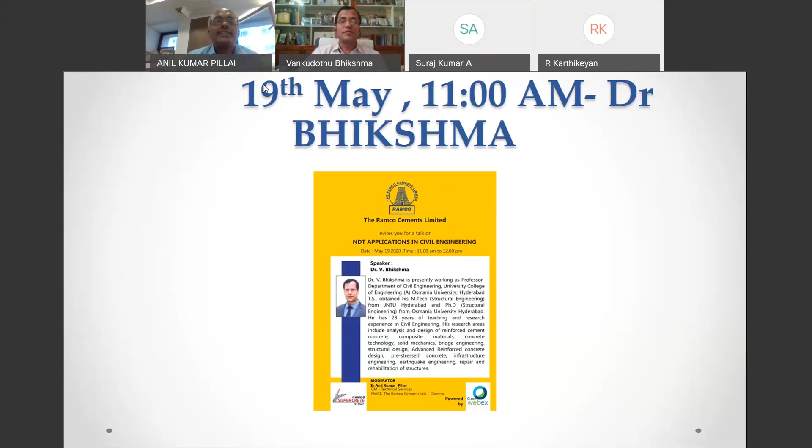I am sure that with the kind of diverse interest that Dr. Bhikshma has, he is the right person to share with us the various nuances of non-destructive testing in concrete structures, and how NDT can be applied in civil engineering.

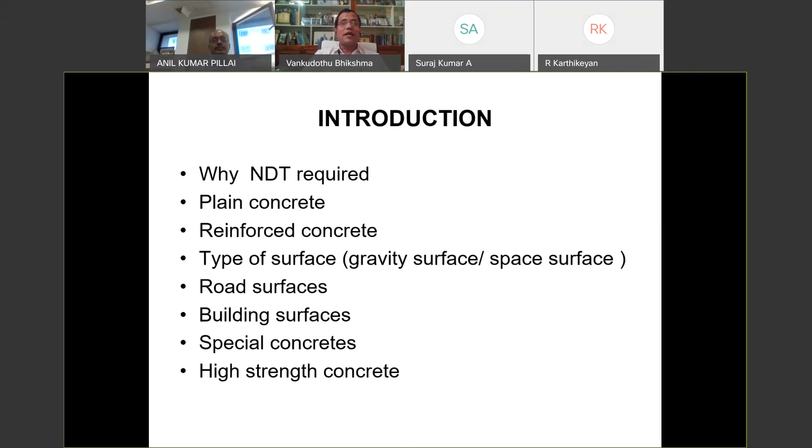To conduct this NDT, we can have plain concrete, or reinforced concrete, gravity surface concrete, road surface concrete, buildings, any special structures, even low grade or high grade concrete - any type of concrete for which we conduct NDT. But one condition is that we can conduct NDT only for cement concrete, not for lime mortar type of concrete or some other concrete. So NDT is applicable only for cement concrete.

To conduct the NDT, first of all, we should know the mix design. Actually, whether mix design is done properly for the concrete or not, we should ensure first. If mix design is not good, then we cannot blame the concrete. Your mix design itself is not good, therefore definitely concrete quality will be poor. So first of all, ensure ourselves that our mix design is good. So we have to first do mix design.

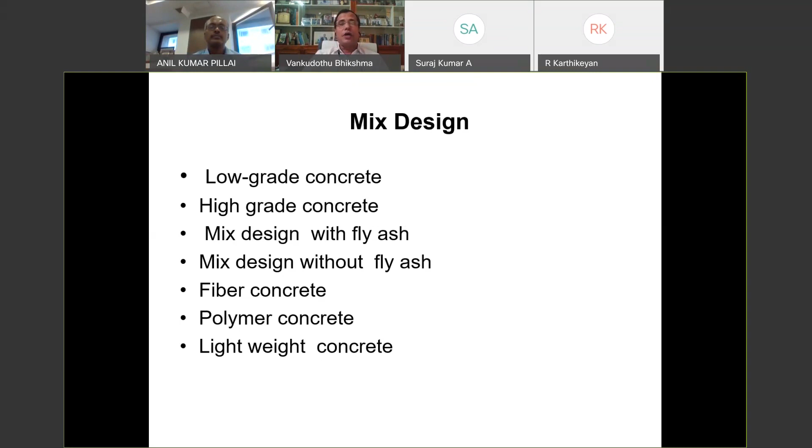To do mix design, we know all the cases for selecting the parameters in mix design. Mix design can be low grade concrete, it can be high grade concrete. The mix design can be with fly ash, mix design can be without fly ash, mix design can be with fiber concrete, polymer concrete, lightweight concrete. It can be with any concrete. So we have to ensure first that our mix design should be good.

Not only that, structural deficiencies in poor concrete also one should know. To conduct NDT, why are we conducting NDT? When some defect is there, we are going to conduct NDT. What is the defect? Suppose a crack is there on the structure. Then if a crack is there, we get a doubt whether the structure is going to survive in future properly or not. Then in that case, you can go for NDT.

Not only that, why are cracks coming on the structure? Cracks may be due to high heat of hydration. Cracks may be due to improper compaction. Cracks may be due to improper ingredients of the concrete. There are several reasons for that, but first of all we should see that we should not have a deficient concrete, we should have a perfect concrete. To have a perfect concrete, we too should have a perfect cement, good quality cement.

Why do cracks normally come? People will say it's with cement. It is not only with cement, it is with some other things also. What are the cracks with some other things? That is nothing but maybe low size of the fine aggregate with which shrinkage cracks will come. Maybe with design also cracks may become, your deflection is not properly designed for a particular beam. Therefore a crack may come. There are several reasons for that.

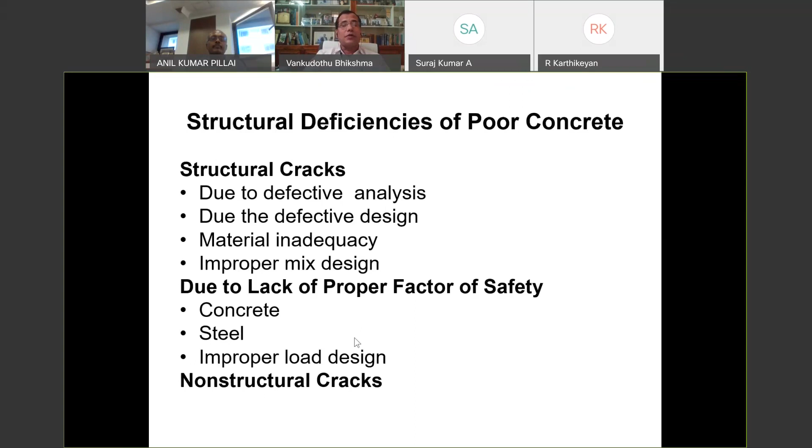Due to defective analysis, due to defective design, due to defective material, improper mix design, there are several reasons for cracks actually. Due to lack of proper factor of safety also sometimes not maintained properly, due to which also cracks may come. Other reasons for poor quality concrete may be OPC cement, maybe PPC cement. Why OPC cement with which crack will come? Because OPC cement will have high heat of hydration. High heat of hydration leads to cracks, and PPC also sometimes cracks will come because of the percentage.

The percentage of ordinary Portland cement and PPC, that is 75% and 25%, we say normally the optimum dosage. Suppose if your PPC percentage is too much, then there is a possibility of getting cracks again. So we should think about what is the optimum dosage for that, think about it, and then use it for our concrete after making several trials. High strength concrete also, due to high excess cement, cracks will come. Low grade concrete, due to low percentage of cement, again bulging takes place due to improper setting.

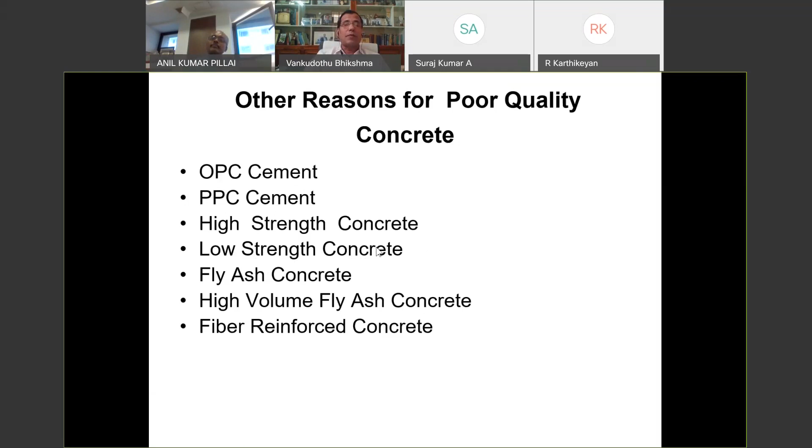So there are several reasons for the cracks again we can say, and poor quality of concrete. Defects in poor quality concrete may be due to raw material, mix design, preparation of concrete, transportation, formwork, placing, compaction, curing and finishing. There are several reasons for getting poor quality of concrete.

Then what should we do actually? How should we control this? Some of you can ask me a question that, sir, to control the quality, there are several measures now. We have ready mix concrete, we have good quality cement, all these things are there. Why again is poor quality coming? That is in our hands again.

Selection of the material is very, very important. Doing mix design is very, very important. Selection of cement is very, very important. Knowing the high excess cement in the concrete is very, very important. Because nowadays we are all moving towards PPC cement. Why? Because your heat of hydration can be controlled. To control heat of hydration, we are moving towards PPC cement. Really, OPC cement has a problem, the heat of hydration problem. So all these things one should understand.

Not only that, ingredients of the material and the reasons, all should be known. Then only we can control the cracks and all the problems in concrete. Sir, your presentation is on NDT.

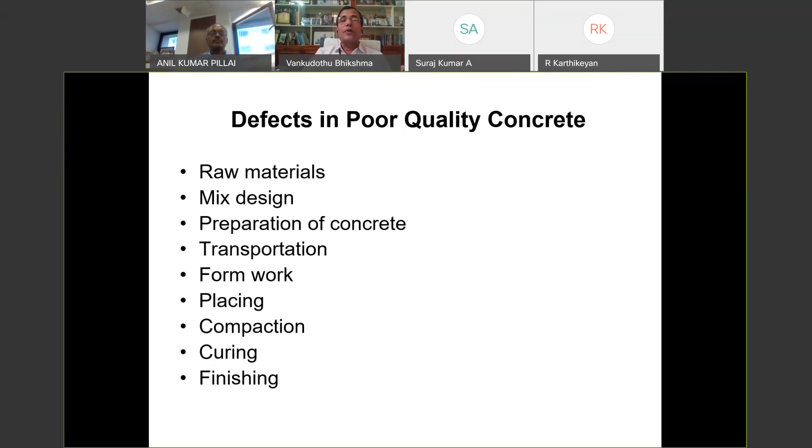Why are you explaining all this? You can think about it, but as an engineer, we should know all these. Then only we can think of NDT, because when we are going to conduct the NDT, you should know the reason why crack should have come. And if I conduct the NDT for a cracked surface, what sort of results am I going to get? This sort of understanding and knowledge is required for an engineer for proper interpretation of the NDT results.

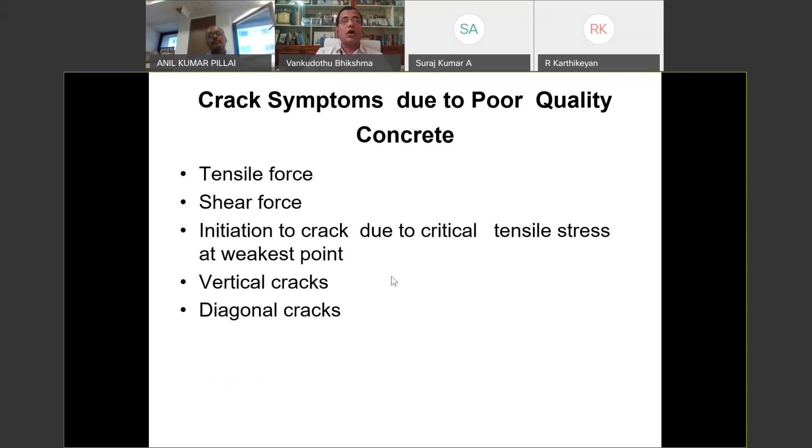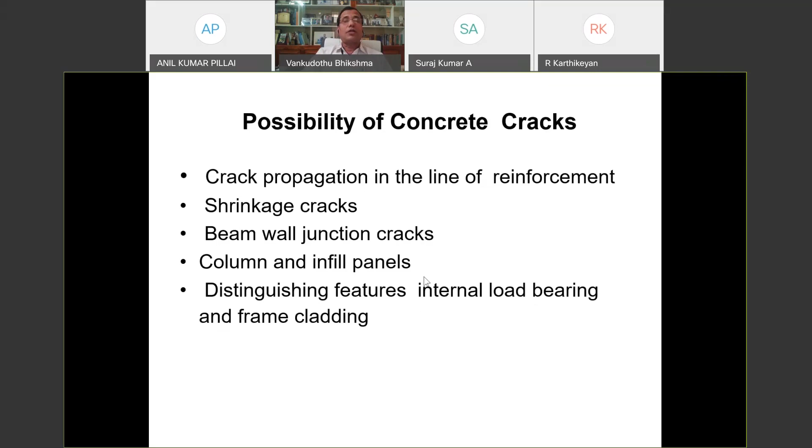That's the reason why we should know all this. Crack symptoms occur due to poor quality concrete, sometimes tensile force, shear force, initiation of cracks due to critical tensile stresses, then vertical cracks, diagonal cracks, all these may be. There is also the possibility of concrete cracks due to shrinkage, due to wall junctions, beam-column junctions, where proper condition is not being maintained. Similarly, in column infill panels, distinguishing features, internal loading etc. will be there, and because of that, cracks will come.

Distortion of cracks due to force, combination of forces, shear cracks, tensile cracks, variability of materials, non-uniformity of the mix design, quality control, maintenance — all these are reasons.

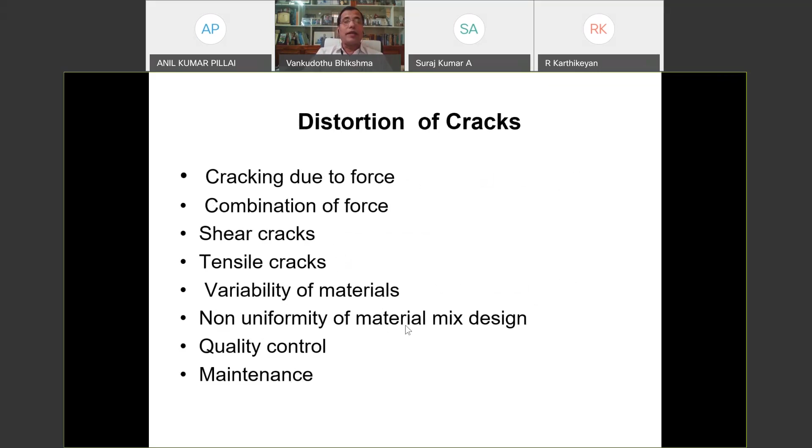Dampness is because of permeability, dampness is because of fine and coarse aggregate. Sometimes we think that good cement and good concrete are used, but still dampness will be coming from some place even for a newly constructed building. We think everything is done correctly — engineer executed well, curing done perfectly, materials used perfectly, mix design done perfectly — why again is leakage coming? These sort of doubts we get, but something has gone wrong there.

What is that something? Not cement. Cement is good, but fine aggregate grading has not been done correctly, because of which micro cracks will form, and through these micro cracks water goes, and if water goes there, dampness prevails. If dampness prevails, definitely there will be permeability. With that permeability, your concrete media becomes very weak, and then it becomes a catastrophic failure at some point of time. That is the reason why we should care about all these, then only we can understand perfectly.

Nowadays, the cement and other materials coming in the market are good, but the other ingredients are causing problems. We are not able to maintain sand grading properly. What should be the sand grading actually? Sand should have a fineness modulus of approximately 2.8 to 3.2, but that fineness modulus is not being maintained.

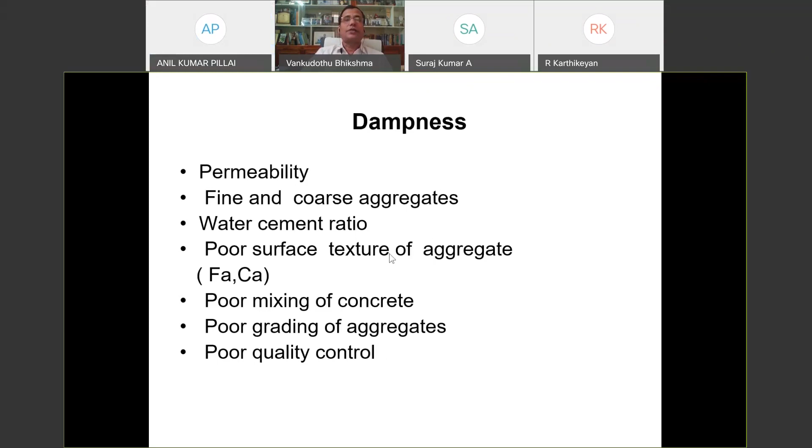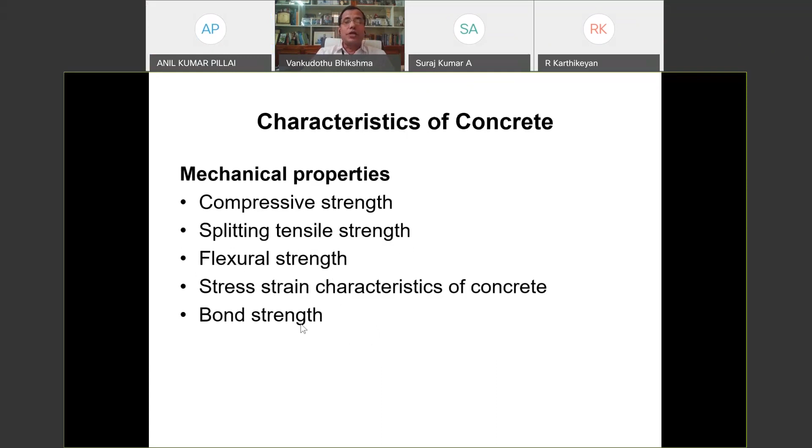Characterization of concrete is also very important. Mechanical properties one should know — compressive strength, splitting tensile strength, flexural strength, stress strain characteristics — we should know all these, then only we can understand. So why am I explaining all this? These are basic fundamentals that we need to know — why cracks are coming, why problems are coming for structures — those are some of the reasons actually.

And we want to know NDT techniques for concrete structures — what are the NDT techniques that help us control all these cracks, control all this permeability. If quality is not there, it means something is happening to the structure. How can we know that? We should not destroy the structure, we should not disturb the structure. Without disturbing, without demolishing, without doing harm to the existing structure, we need to assess it. We need to know the reasons for it, and after knowing the reason, we have to do something about it.

We are not feeling easy. For example, we go to a doctor. The doctor will diagnose and tell us the problem with our human health. Then accordingly we will take medicine and try to cure it. Similarly, with a structure, we don't know what happened to it, but some leakage is there, some cracks are coming. Why these cracks and leakages are coming, we don't know, but we want to do something for it because now it is suffering. It should not suffer further. To stop it from suffering further, we need to go for NDT, non-destructive testing, without disturbing the structure.

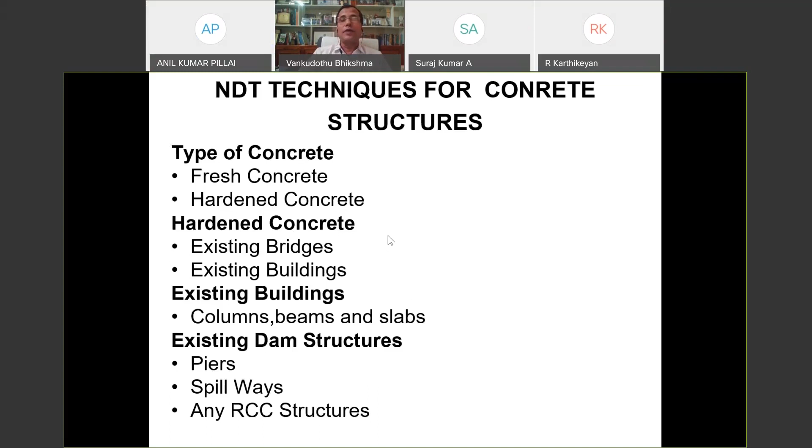Or when we go for NDT, suppose severe leakages are there which cannot be controlled. So what we should do is conduct NDT and know whether minimum strength is there to repair. Concrete is subjected to leakage, concrete is subjected to cracks, then we need to do something, and for that we have to think about so many parameters. That's the reason why we need to go for NDT only for hardened concrete, not for fresh concrete. So, necessity for NDT, need for NDT.

Necessity for NDT is to know the approximate grade of concrete, approximate strength of concrete, ingredients of the concrete, quality of the materials used, durability of the concrete for existing structures, and bearing capacity of the concrete for service loads. We want to know the strength and grade of concrete because it is already given to some structure where cracks are coming, proper strength is not there, and deflection is being formed, for which we want to assess whether the concrete has proper quality in that structure. We want to know ingredients like fine aggregate and coarse aggregate used, quality materials, durability, and bearing capacity of the concrete.

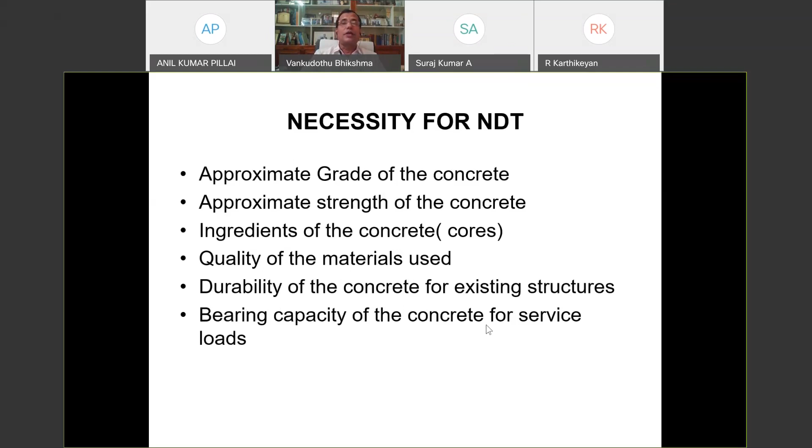So, NDT tests. What are the different NDT tests that we have now? Different NDT tests are ultrasonic pulse velocity test, Schmidt rebound hammer test, core cutting test, infrared thermographic camera, ground penetrating radar, etc. These are all the different test methods available in civil engineering to know the quality, durability, and status of the concrete.

Ultrasonic pulse velocity gives what? Schmidt rebound hammer, this method gives what? Core cutting test gives what? Infrared thermographic camera gives what? Ground penetrating radar, these all come under NDT, non-destructive test, without disturbing the structure, we want to assess its quality.

So the first one is ultrasonic pulse velocity, which gives quality of the concrete. Rebound hammer gives strength of the concrete. So what is the quality of the concrete and what is the strength of the concrete? Quality of the concrete and strength of concrete are different actually. Can anybody say quality and strength both are the same?

Hello? Can anybody say? Quality and strength, both are same or they are different?

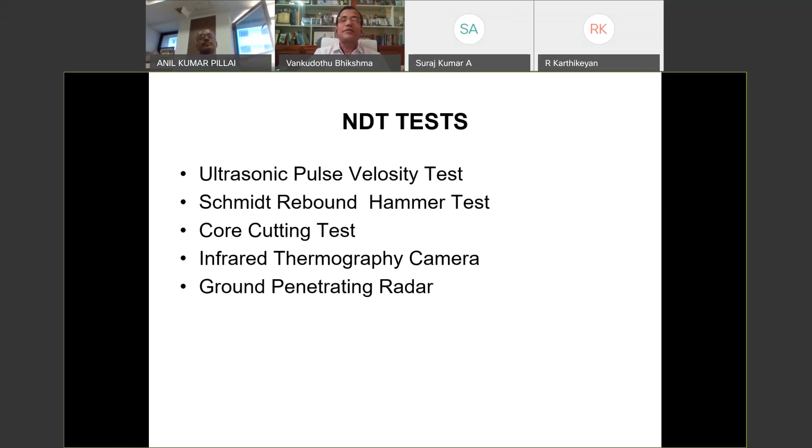So we will see one by one. Ultrasonic pulse velocity means what I told you just now, it is meant only for quality. So how we are going to analyze the quality, I will tell you now.

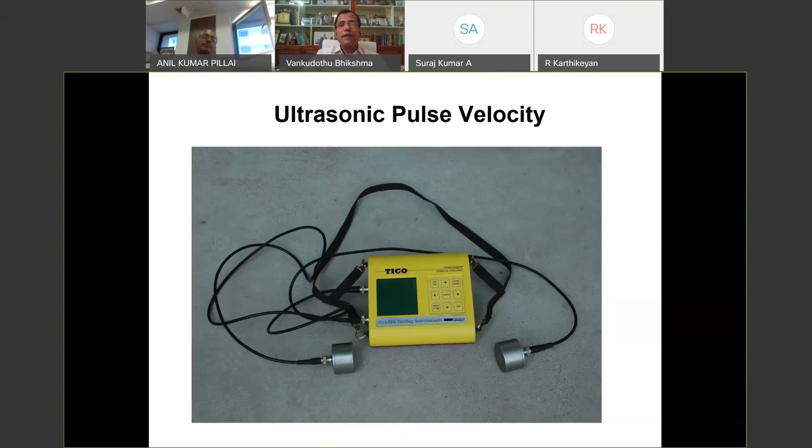This is the equipment, the ultrasonic pulse velocity equipment, an electronic, battery-operated equipment. Batteries will work for 10 hours continuously, and you have two electronic transducers. We apply them on the concrete surface, maybe column, maybe beam, and send the velocity into the concrete. This is a cube on the equipment for example, then apply grease on both surfaces, and apply both transducers in opposite directions. The velocity travels through the media, and we get a velocity value directly displayed on the equipment. That is called velocity.

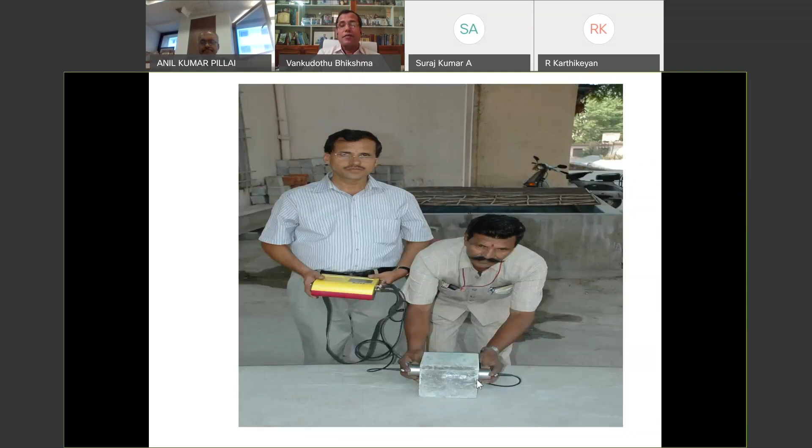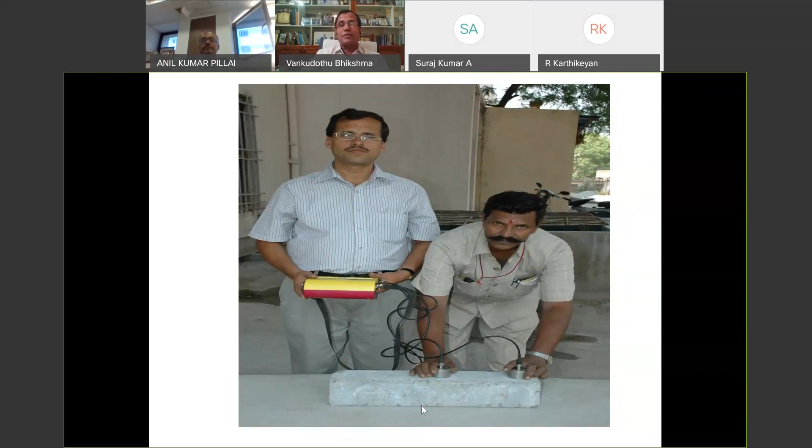For beams and columns you can use direct method. For slabs we cannot use direct method, because we cannot keep one hand from the top and the other hand from the bottom since the slab is there. So for slab surfaces we use the indirect method. This is how we use NDT for ultrasonic testing.

Whatever I am saying about ultrasonic pulse velocity is not from myself, it is according to the code IS 13311 part 1, 1992 - direct method and indirect method. In direct method, pulse velocity is introduced into the concrete media in the opposite direction. In indirect method we use the same surface.

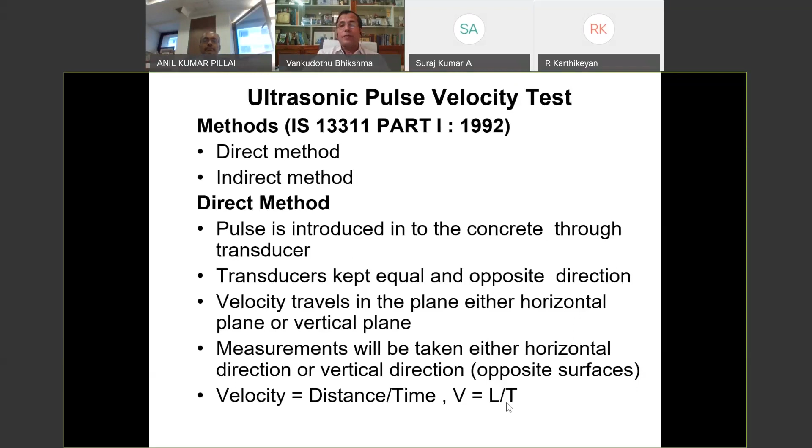The whole description is not necessary for us, the final result is necessary for us. Velocity equals distance by time, V equals L by T or D by T. This is the interpretation of the indirect method I told you, and this is a very important chart required for us.

Velocity criterion for concrete quality grading means velocity of the cross probing, distance by time in kilometer per second. If your value of velocity is above 4.5, it is excellent quality. If velocity is 3.5 to 4.5, good quality. 3 to 3.5 is medium quality, and below 3 is doubtful. So we can use this chart to understand the quality of the concrete.

Suppose on a particular surface your quality is 3, which is doubtful, or 3 to 3.5 which is medium. You are trying to go for one more floor and your value is medium or doubtful. How can you take a decision to go for another floor? It is very difficult because your values are medium and doubtful. If you had gotten 4.5 or 3.5 to 4.5, excellent or good, it would not have been a problem.

But if you get values of 3 to 3.5 and below 3, which are medium and doubtful, you must go for another alternative method, that is compressive strength, and if necessary core cutting. If you get an excellent value, you can take a decision immediately. When you get a doubtful result, you go for the next alternative method.

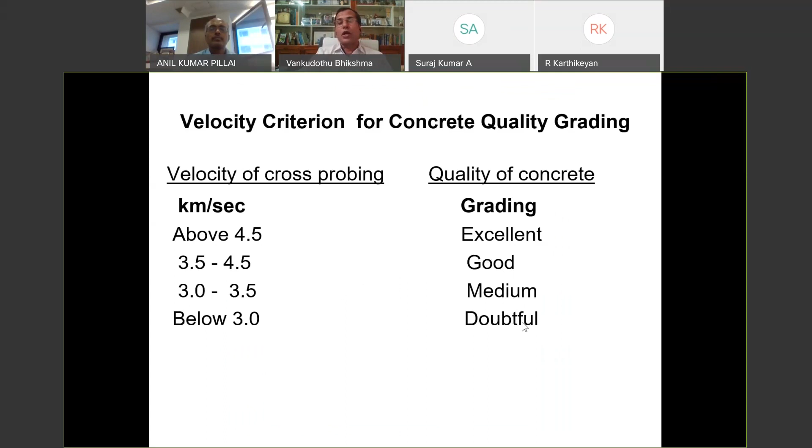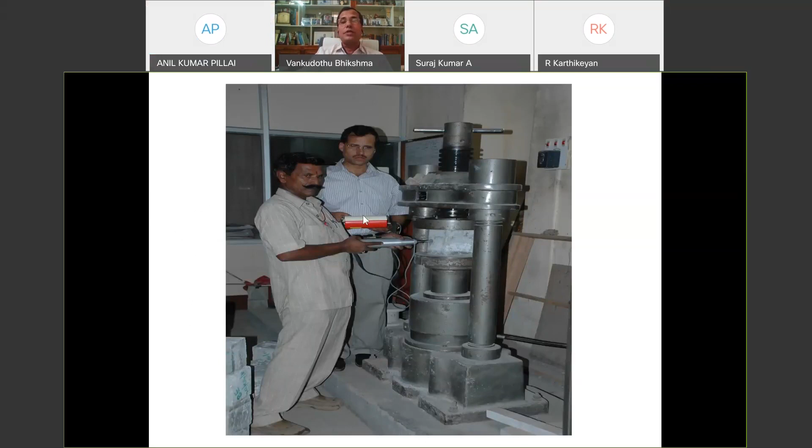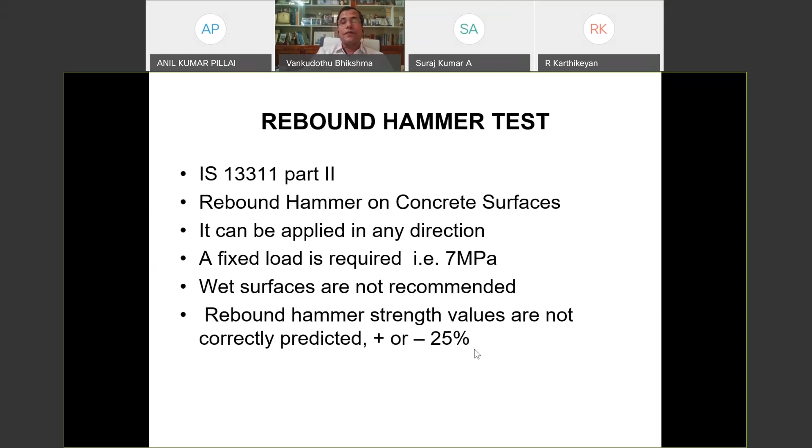Then we can go for core cutting. Suppose in ultrasonic pulse velocity you get a doubtful value, and in compressive strength rebound hammer values you get only 10 to 12 MPa strength. In both cases you have doubt now. So what will you do? You go for another alternative, that is semi-destructive test, that is core cutting.

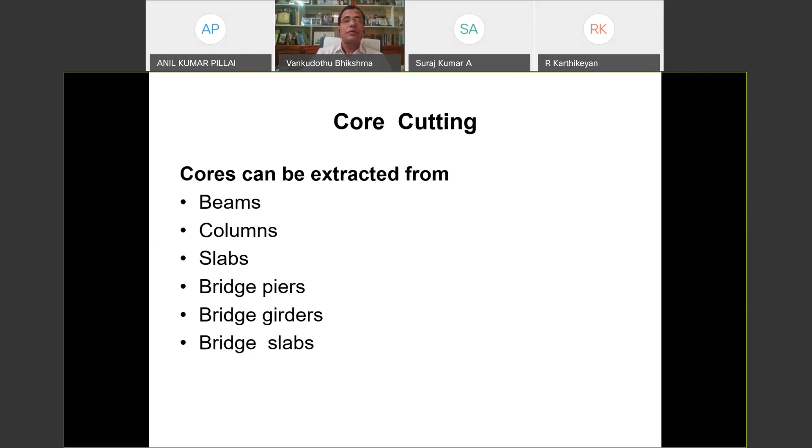Cores can be extracted from members like beams, columns, slabs, bridge piers, bridge girders, and bridge slabs. You can extract cores from any of these members and confirm the compressive strength results. The core should not disturb the steel.

When you cut the core, it should not disturb the main steel. The core location should be identified with the help of a profometer. We want to cut the core from the concrete, but at the same time we should not disturb the steel inside. For a slab, you can cut the transverse reinforcement, no problem. But for columns, if you cut the main reinforcement, since the column is subjected to axial load and taking a lot of load, there will be a problem if the main reinforcement is disturbed. That is why we should identify where the bar is not there, and cut the core only there.

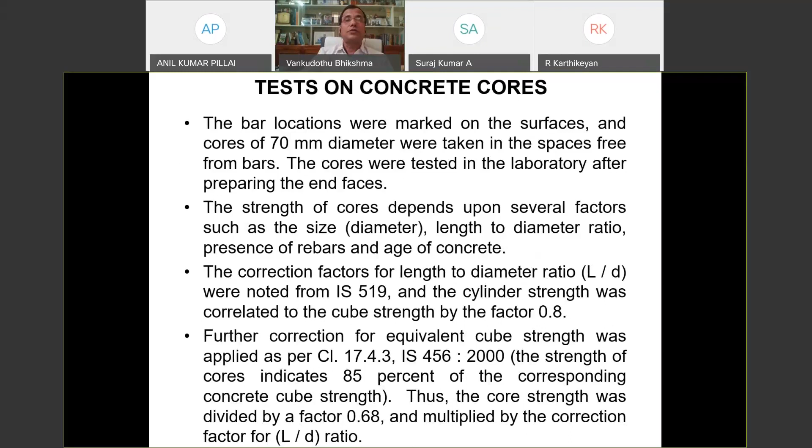To identify the bar inside the concrete member, we have an instrument called the profometer. With the profometer we can identify the bar location, and then we can proceed to cut the core.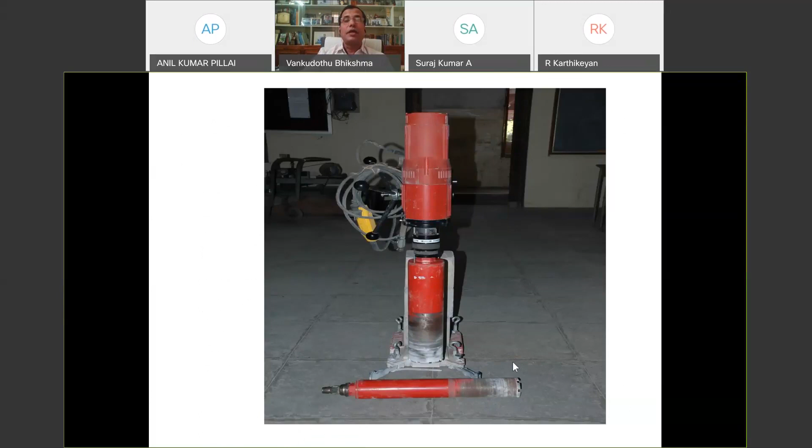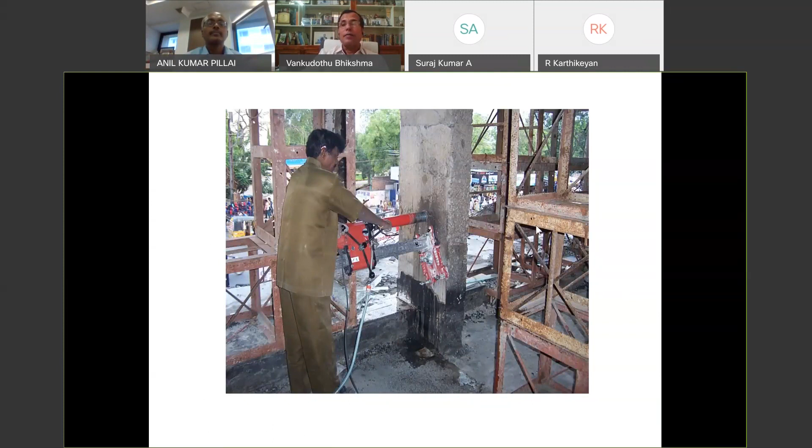Now I am going to present a case study for 5-10 minutes. Here we are cutting a core on a column. He is my technician, cutting the core on a column to know the concrete quality. We can cut the core in horizontal direction for a slab, or vertical direction for a column. In any direction we can do that, and we take the cores from different members in this fashion.

These are the cores taken from different members. After you cut the core, you keep it on a surface and put phenolphthalein solution on it. The moment you put phenolphthalein drops onto the core, the core turns pink.

This indicates that the concrete inside is not deteriorated, not corrupted, and not attacked by sulfate or chloride attack. It is a physical indication that if the color turns pink, the concrete quality is assumed to be okay and good. If the color does not turn pink, it is assumed that the concrete is disturbed, having sulfate attack, chloride attack, and so on.

We can do these physical tests primarily, and then cap the cores top and bottom with 1:3 cement mortar, cure for 7 days, keep it under the compression testing machine, and apply the load. Load divided by area gives you stress, and that is how we get the exact compressive strength. This is the core again which I showed you.

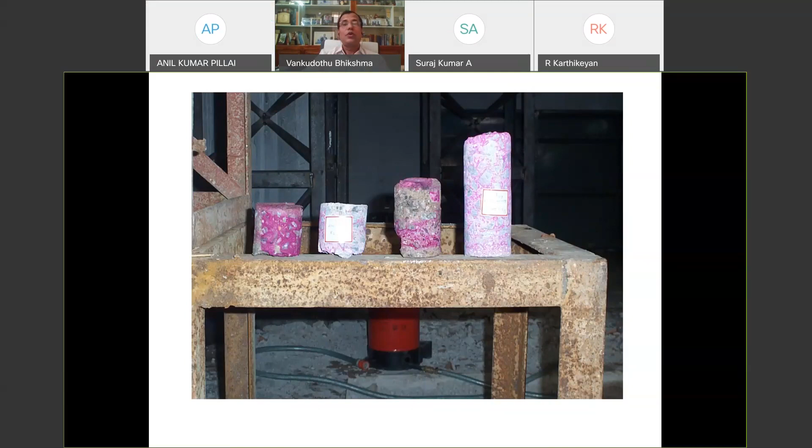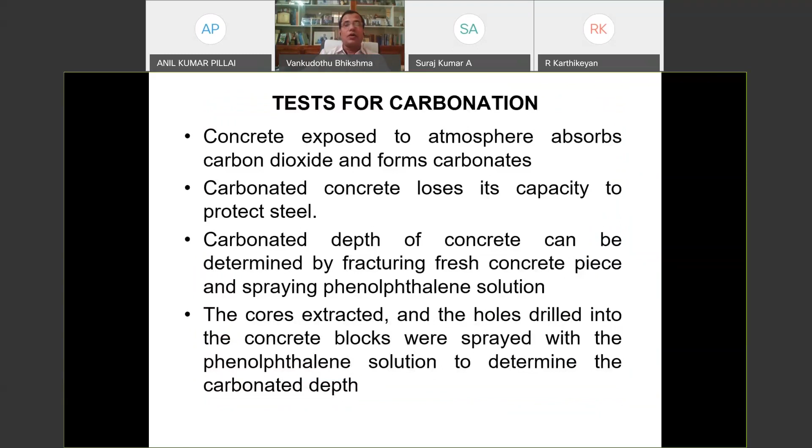The profometer is there for knowing the bar inside the concrete, as I told you earlier. For column concrete, we can cut a core for the column, but at the same time the bar should not be subjected to disturbance. So we put the profometer on the machine, which has a dialog box. We scroll horizontally and vertically on the column to locate where the bar is. Wherever bars are not there, we decide that area and cut the core so that we do not disturb the reinforcement.

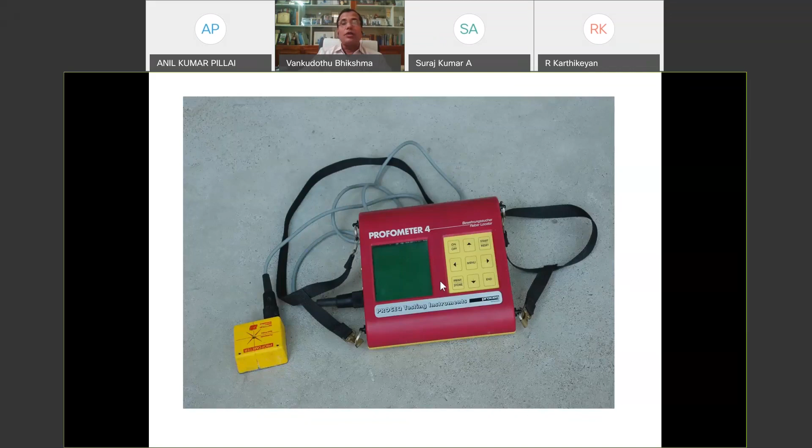So you cannot cut the reinforcement if you can identify the bar inside using the profometer, otherwise the axial column load capacity will be disturbed and the column will face problems. This is the corrosion analyzer, another NDT equipment. If some reinforcing bars are exposed outside, we can touch this equipment on the bar to find its diameter, and also the corrosion percentage, how much corrosion has taken place in the slab. We can identify that, interpret it, and decide whether the bar should be removed or painted. This is called the corrosion analyzer, an NDT equipment.

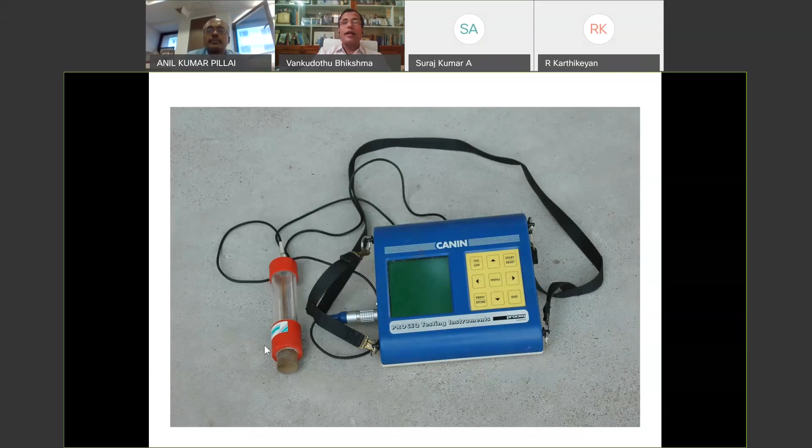This is very interesting actually. This is not like our UPV (ultrasonic pulse velocity), rebound hammer, and core cutting. This is entirely different: infrared thermographic camera, to know the inside quality of the concrete, water leakages, corrosion of the steel, magnitude of the concrete corrosion, roof leakages through concrete, and several other things we can know from this camera.

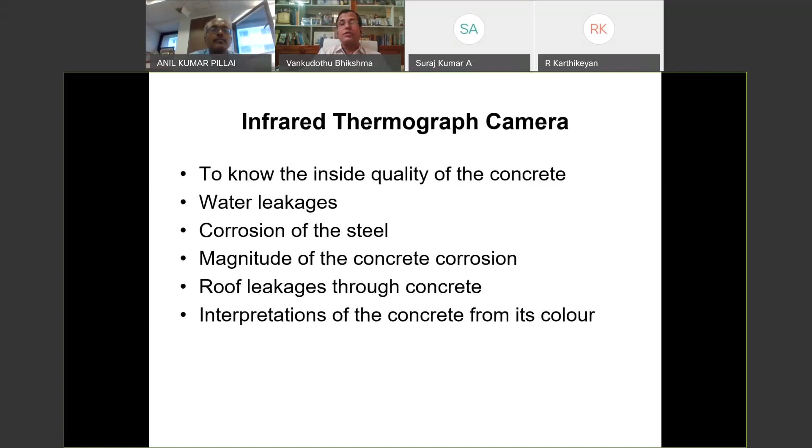What is this equipment? How does it look like? This equipment is this actually, called infrared thermographic camera. This is also a battery operated equipment. 10 to 12 hours the camera can work if you charge the batteries. And this camera can focus for a longer distance, up to 3 kilometers.

In the concrete surface, if you focus, this camera can tell you whether the concrete media is safe or really corroded with the steel. Suppose moisture is on the surface of the concrete - that means some alkali aggregate reaction has started inside the concrete. So how much intensity of the alkali aggregate reaction is there inside, how much percentage of corrosion must have taken place, and what is the concrete area being covered - this camera can easily tell us. Based on that, we can take a decision.

And this camera, specifically not just for civil engineering applications, can be used for other engineering applications also. For example, electrical engineers have turbines. Turbines will be working 24 hours, 365 days continuously, and will be subjected to heavy heat. Sometimes the turbine can fail. So these cameras focus on whether it's within control temperature or not - we can detect it. If temperature is exceeding, we can take a decision and stop the turbine.

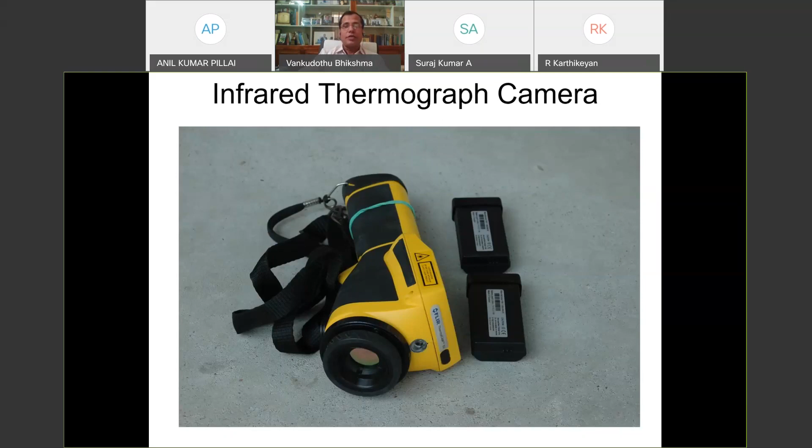Mechanical engineers will use this, civil engineers will use this. This camera is a very, very powerful camera. It can give you vision up to - even military engineering people will use this camera. If you can stand on Birla Temple or any height and focus 2 to 3 kilometers, it can give you vision of what is happening around. Military people will use this for military operations. So this is a very, very important powerful camera which can be used in civil engineering applications as NDT. Here's another view of the infrared thermographic camera.

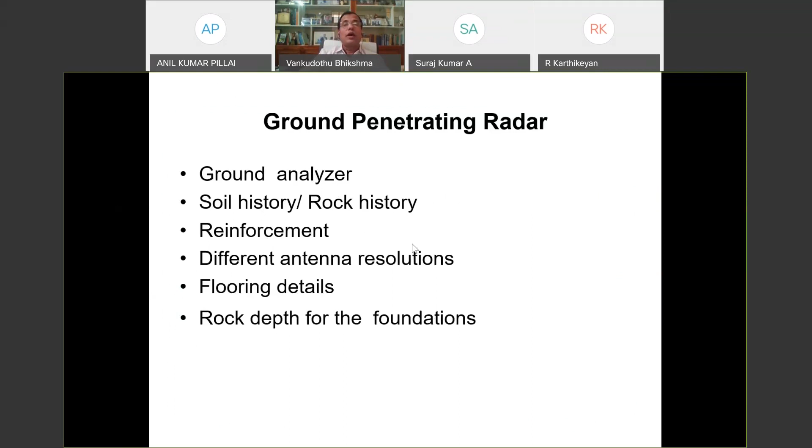And then the last one is your ground penetrating radar, where we can use ground history. This is a ground analyzer - soil history can be known, rock history can be known, reinforcement can be known. This is a simple ground penetrating equipment where you have a small motherboard, a computerized motherboard, where the whole data can be captured.

Suppose your flooring is there, and you have a slab on which flooring is laid. What is the thickness of the flooring? You don't know. And what is the reinforcement in the slab? Sometimes you want to know. For this, you can just scroll on the surface of the flooring, and then the flooring thickness, slab thickness, slab reinforcement details - everything you can know. This is called ground analyzer, ground penetrating radar.

This has several civil engineering applications. We can use this, a particular ground penetrating radar - suppose at some place your bridge pier has settled or buckled. You never know whether it is a design problem of the pier or a design problem of the footing. Footing will be there inside the ground, right? If you can make a neat surface around the pier and just scroll around it, this ground penetrating radar can tell you whether the footing size is proper or improper - whether the failure is because of the footing or something else. These sort of things, without excavation, without doing anything, we can know the reasons. This is called ground penetrating radar.

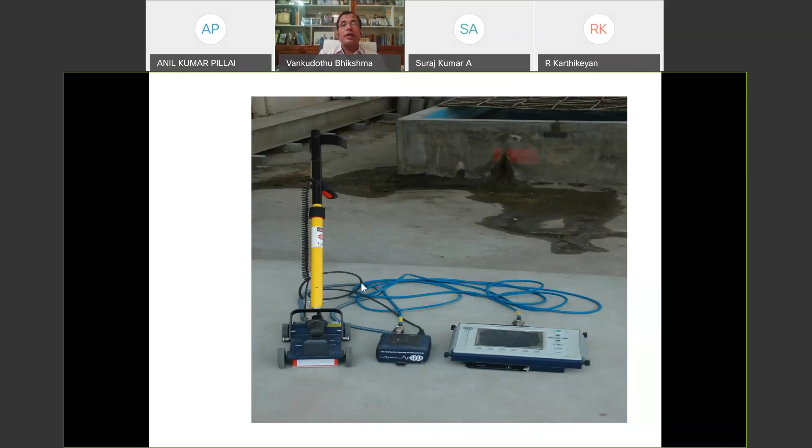This ground penetrating radar has resolutions of 2-meter, 3-meter, 4-meter, up to which we can scan the ground and know the ground history. This is a 3-meter scan and this is a 5-meter scan. Up to 5 meters we can scan the ground and know the ground history. This is called ground penetrating radar.

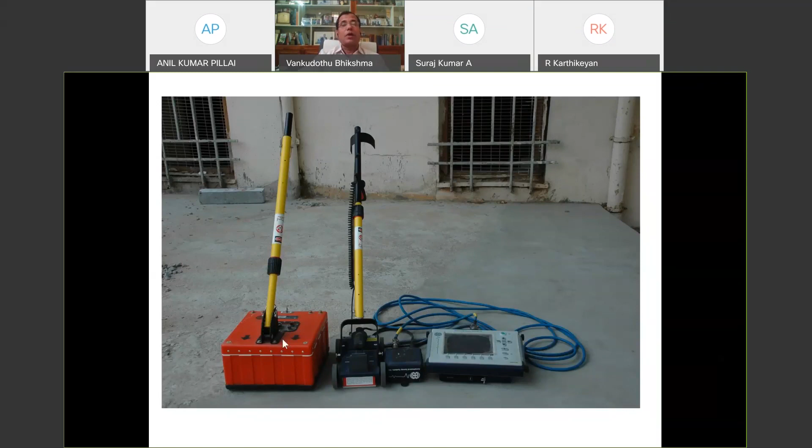We are not excavating the ground. We are trying to know what will be there in the ground - whether rock, moram soil, or clay is there, and whether it is easy or hard for excavation. That type of history we can obtain from the ground so that we can easily make the estimation. This is called ground penetrating radar.

Now I will spare another 10 minutes on this case study. Very interesting actually - this case study is again about a fire accident that happened at the Pushpanjali complex. We did consultancy work from Osmania University. This is a case study.

Pushpanjali complex, a 9-storied building in the busy commercial zone of Hyderabad, ravaged by fire on 5th February 2006. The complex caught fire early in the morning at 6 o'clock. Fire was confined to the first and ground floors. Few shops storing combustible materials such as cloths and books were gutted.

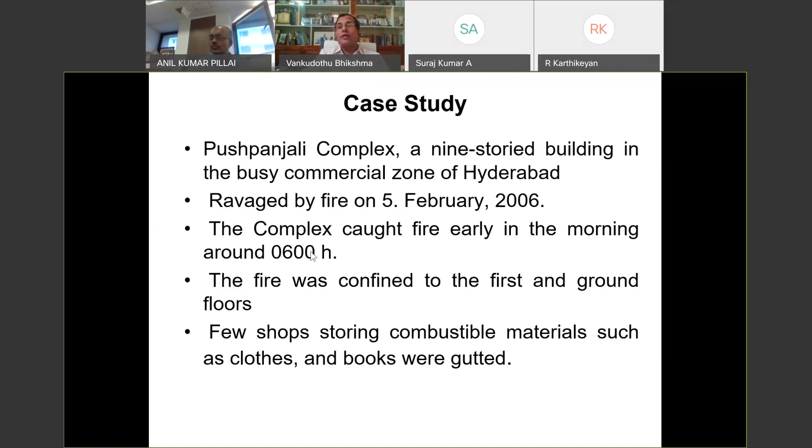This particular case study is a fire accident building. The fire accident happened early morning at 6 o'clock, and that is a commercial building. You can see, this is a commercial building exactly opposite to Koti Medical College - Pushpanjali complex.

Morning at 6 o'clock, the fire accident happened because combustible material was dumped at the escalator inside the building. All the cloth merchant shops and commercial shutters were there around the building, but near the escalator inside, thermocol was dumped, and from the thermocol there was an electricity short circuit, and fire got intensified inside the building at 6 o'clock morning, because all shops would open at 10 or 10:30 since it is a commercial building. But this accident happened at 6 o'clock morning.

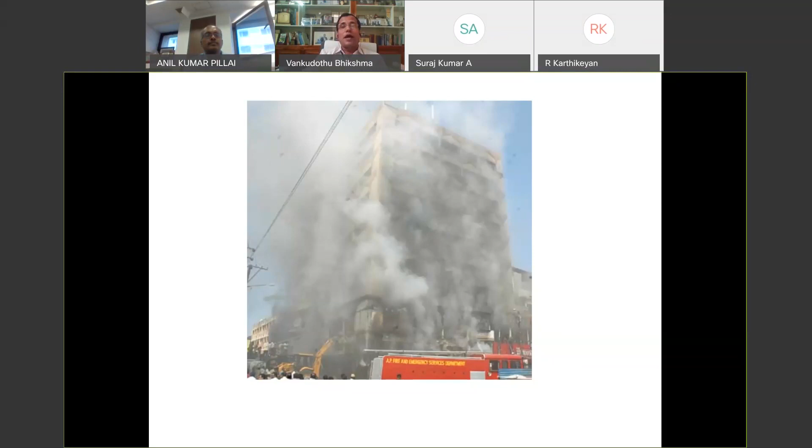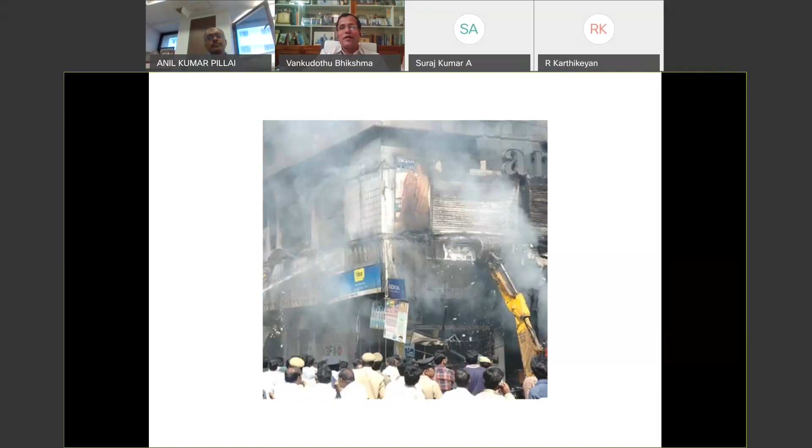Why am I telling all this? Because we analyzed the NDT applications we used for this building, and we gave a retrofitting scheme also. The building is in service now.

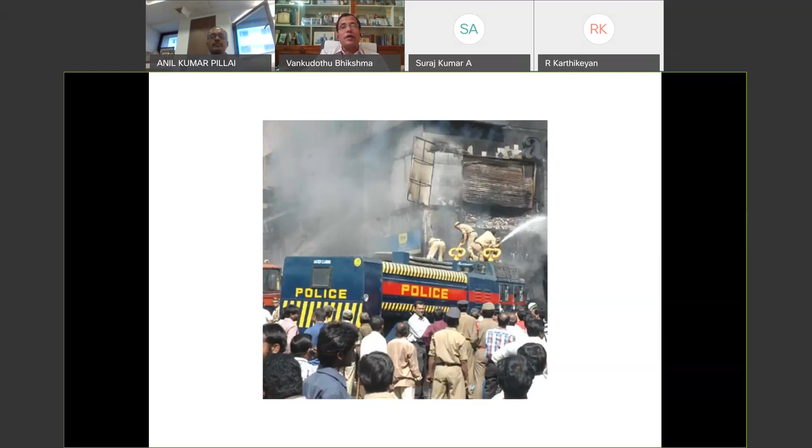The firefighters came and tried to stop the fire, but were not able to go inside because all shutters and doors were closed. They tried to spray water from outside only. So this was the fire intensity.

After the fire was stopped, they approached Osmania University, and my Professor Prakash Rao was the head of the department of civil engineering. I was assistant professor at that point of time. So myself and Professor Prakash Rao went to the building, because the House Owners Welfare Association people called us for investigation on whether the building was going to be safe or unsafe.

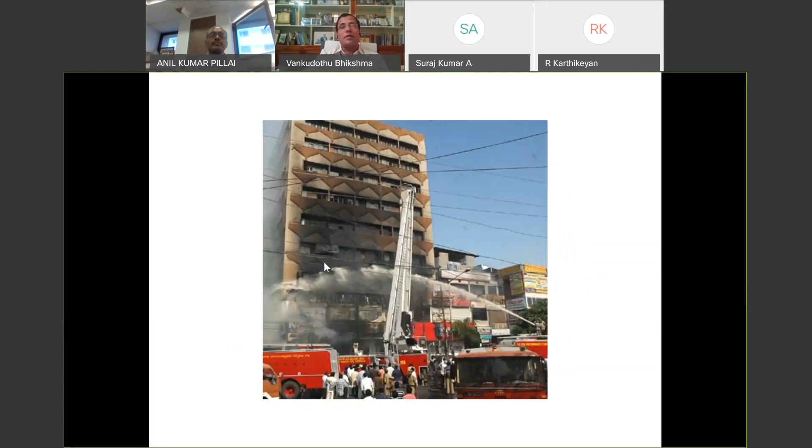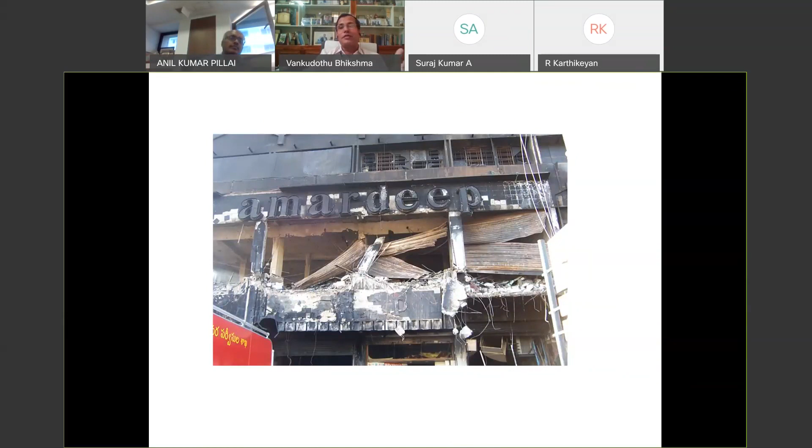As you have seen the pictures, up to the 4th, 5th floor of this total 9-storied building, on the 5th, 6th floor up, all the inside concrete members were damaged, and the fire was like this. We went there and investigated the building - I can show you some of the columns were crumbled like this. These are the pictures; the shutters were broken with a JCB in this manner. This is the situation of the building after the fire.

What did we do for this building then? We asked them to give support first to the building, because one side of the building was damaged severely, while the other side was not damaged severely.

Almost 60 to 65 columns are there for this building. Out of these, 18 to 20 columns were completely crumbled. So alternatively, we told them immediately to give support to this building, and they have given support.

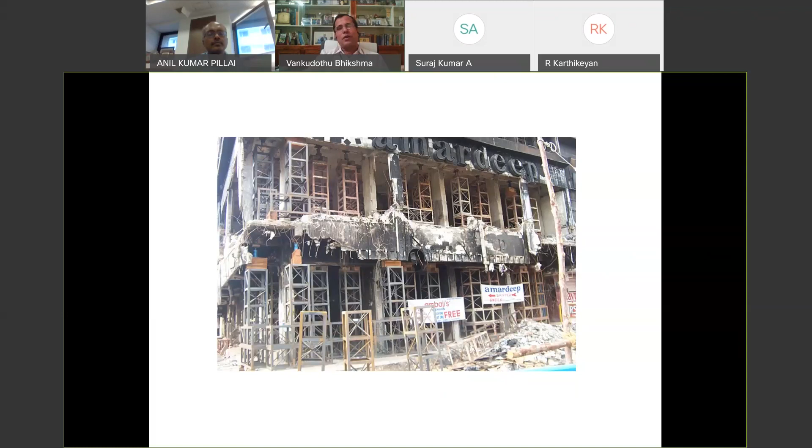After that, you can see some of the columns were crumbled like this, but here fire is not there. The beauty of our discussion here is, where fire flames are not there, their column is crumbled. But here, where complete fire is there, the column is not crumbled.

This is fully contrary to the other columns, right? So this is because of some disturbance from outside. With the JCB hit and all, the columns were disturbed. Because all shutters were closed, they were trying to break the shutters with the JCB. In that process, a horizontal force came and the columns were disturbed.

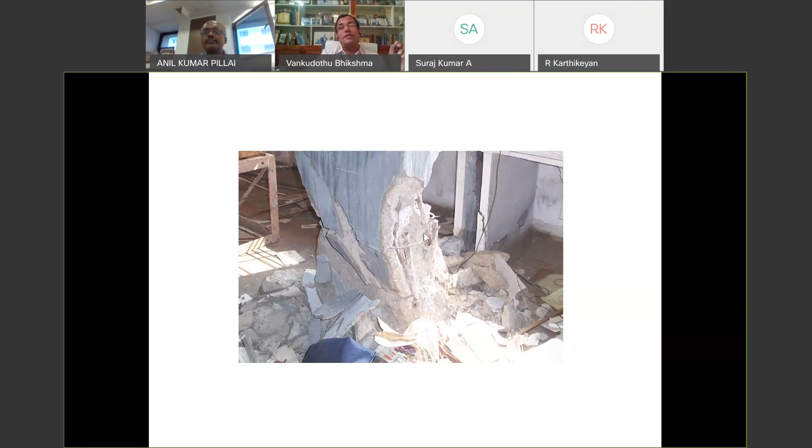Otherwise, some other mistakes also - you can see all the slabs are at one place. This is one slab, this is another slab. And the second thing is, this building was 50 years old at that time.

Now by this time, it's 60 years. So at that time, coarse aggregate was not much available - it was only man-made coarse aggregate, made with a hammer by labor only. Jaw crushers were not there. Abundant sand was there at that point of time, so the concrete here is very poor.

So with the horizontal hit, this was disturbed, and the columns were crumbled like this.

Then we were under the impression to remove the building, but the owners requested us to do a repair scheme, because Hyderabad is not in a danger zone, and therefore we can go for repair. They didn't want to demolish the building - that was the owner's view. We also warned them that the building will not be safe in future, but they requested us to give a retrofitting scheme.

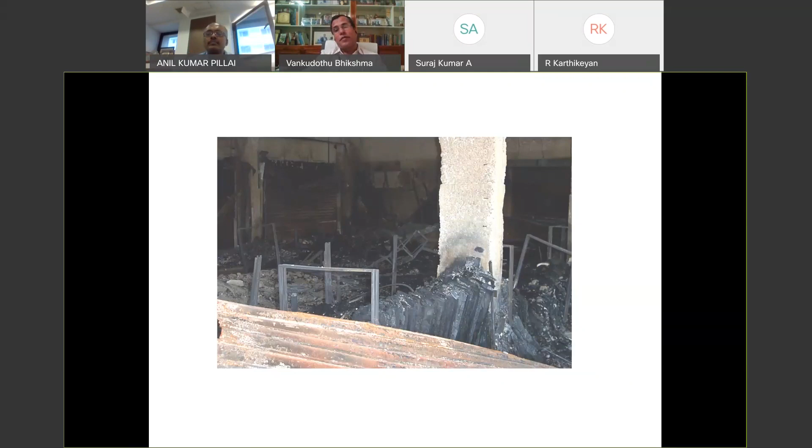One by one, from ground floor to 5th floor, columns were encased with 16 millimeter bar and 75 millimeter concrete around with special concrete. All the columns were strengthened, loose debris was removed, and then all the slabs were also strengthened with reinforcement on both sides, both directions. The building is retrofitted.

The building is in service now, actually. We conducted NDT, and concrete NDT results showed minimum M15, M20. With this minimum M15, M20, the existing structure is okay, but in case of an earthquake, the building will not be safe. We told them that the building will not be safe in case of earthquakes in future.

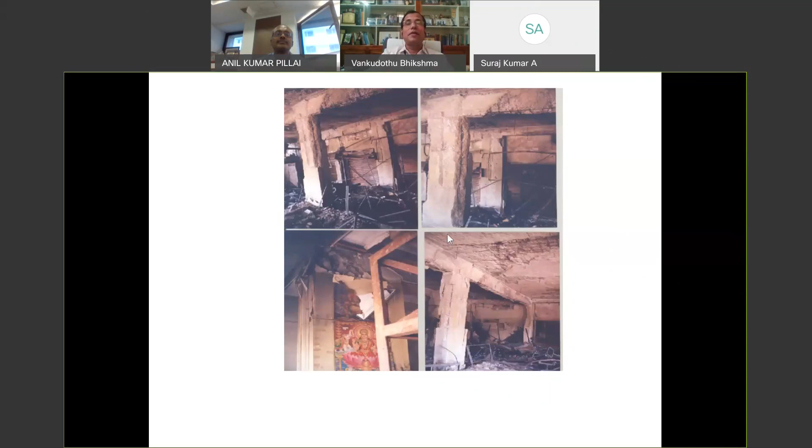The happiest thing is the building is in service now. So what I mean to say is, with NDT applications, we concluded that this could be repaired, and the building is repaired and is at this moment in working condition. This is what NDT can give us - a lot of inputs, a lot of confidence to do something. Otherwise, it is very difficult to take a decision. So NDT gives us reliable information, and if you do it systematically, we can really make structures safe by retrofitting them.

It means, if something happens to the building, what is our next view? If something happens to a human being, an accident happens, what should we do next? We should admit the patient into the hospital. The doctor will then take a decision on what sort of treatment is to be given to the patient. If some leg break is there, they will fix it. If minor injuries are there, they repair it. Or if some head damage is there, they will treat it. That sort of decision will be taken by the doctor.

That's the reason why, being a civil engineer, I want to tell all professional colleagues that if some problem comes to the building, immediately rush to the expert and seek their opinion, so that the expert can tell you what is to be done.

You are a civil engineer, you are like a doctor. Civil engineer means civil engineer is also like a doctor. If any problem comes to the building, people call the civil engineer. But sometimes the civil engineer will not be expert in all fields, so the civil engineer should run to the expert again.

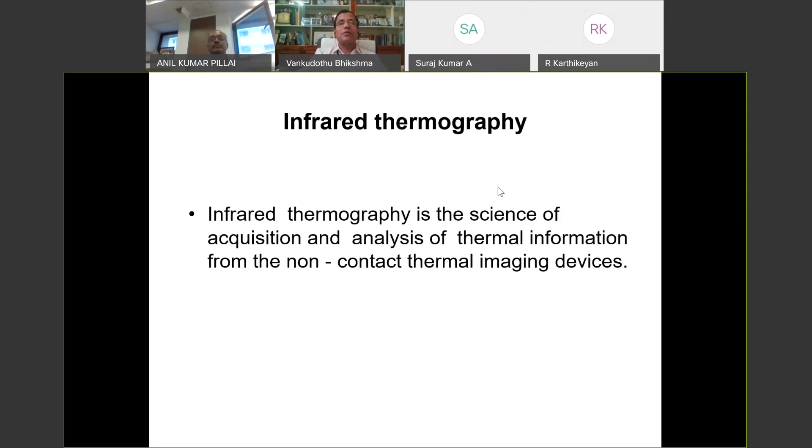So infrared camera, I told you, is for quality. The applications of all these NDT techniques allow research and development. We can do a lot of research in that.

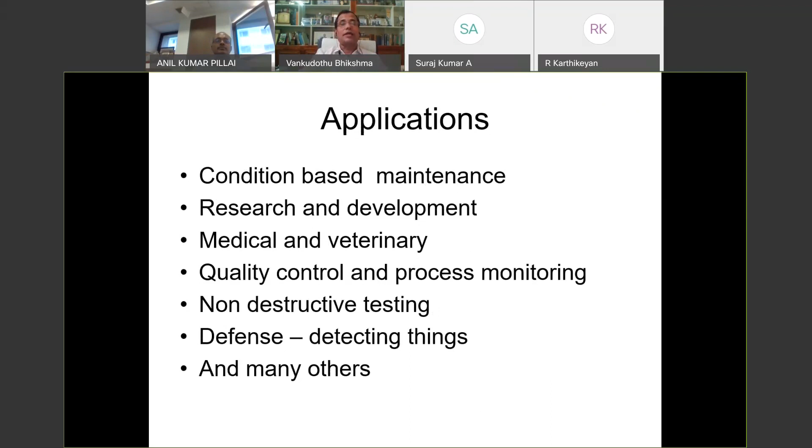You can understand so many things. All the things we can understand from NDT, like what is to be done next. Condition monitoring, all these things we can really do.

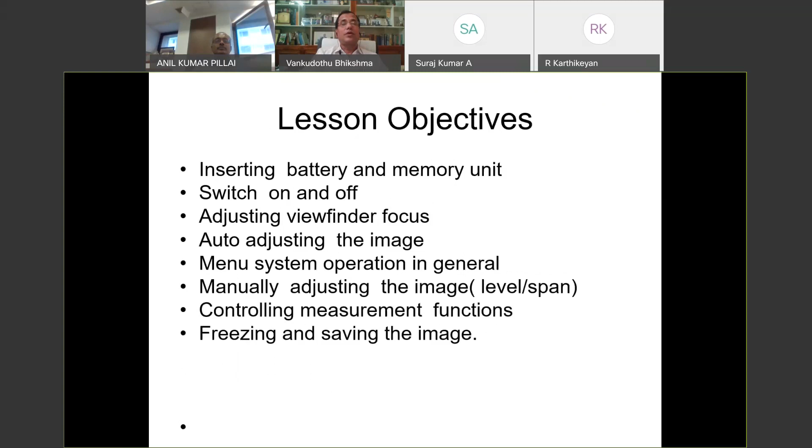If quality is good, we can understand better. If quality is good, there is no problem with strength. If quality is not good, there will be a problem with strength again. Quality is not good, slowly strength also gets reduced.